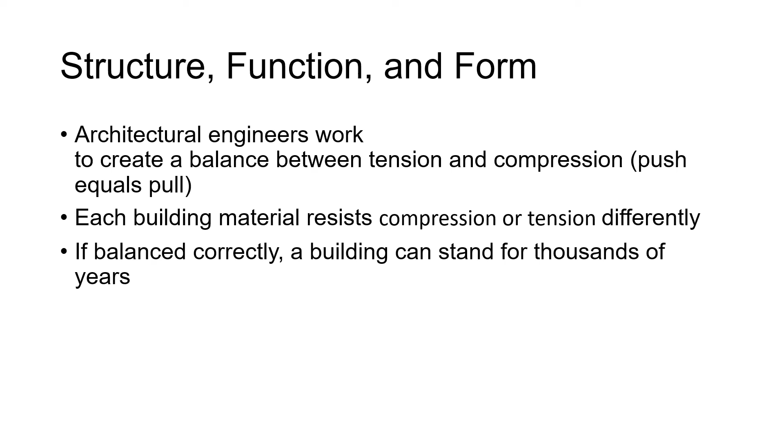Architectural engineers work to create a balance between tension and compression, which is basically push equals pull. Each building material must resist compression or tension differently. And if balanced correctly, a building can then stand for thousands of years.

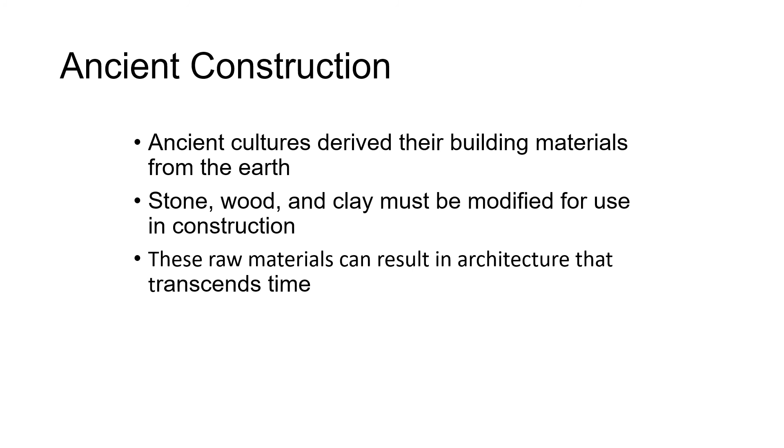If we look back to the ancient constructions of architecture from our past, there are a few things we need to think about. The fact that ancient cultures derived their building materials from the earth, that stone, wood, and clay would have to be modified for use in construction, and that these raw materials could result in architecture that would transcend time itself. We're going to first look at the most basic load-bearing construction.

This form of construction follows the direct process of piling just one stone or brick on top of another. Massive load-bearing works have been built throughout the course of history.

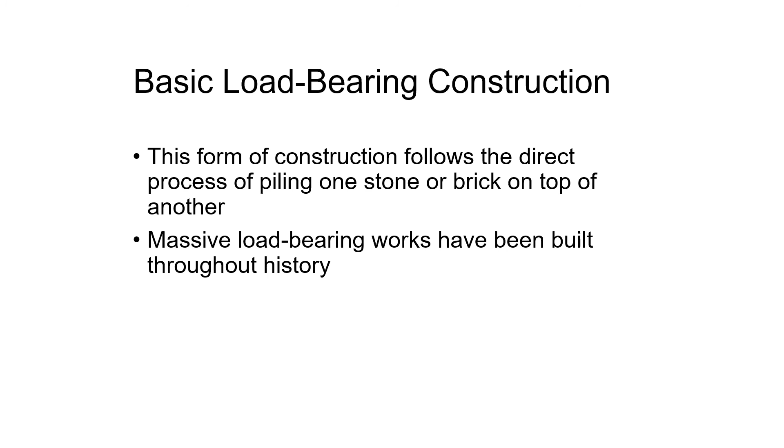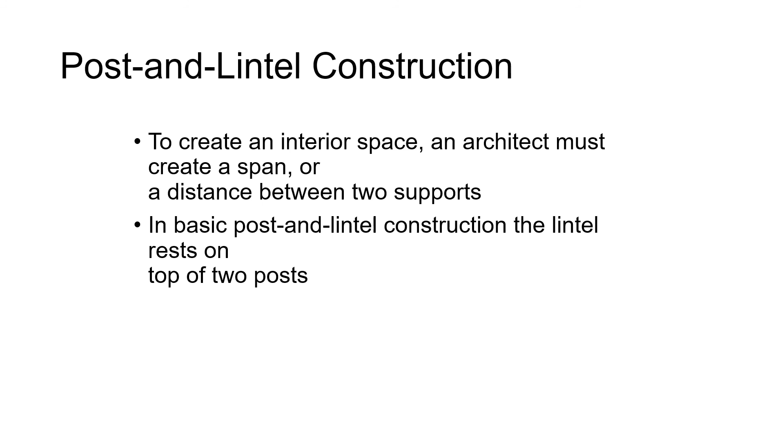As we move away from load bearing construction, we move along to post and lintel. To create an interior space, an architect must create a span or distance between two supports. In basic post and lintel construction, the lintel rests on top of two posts.

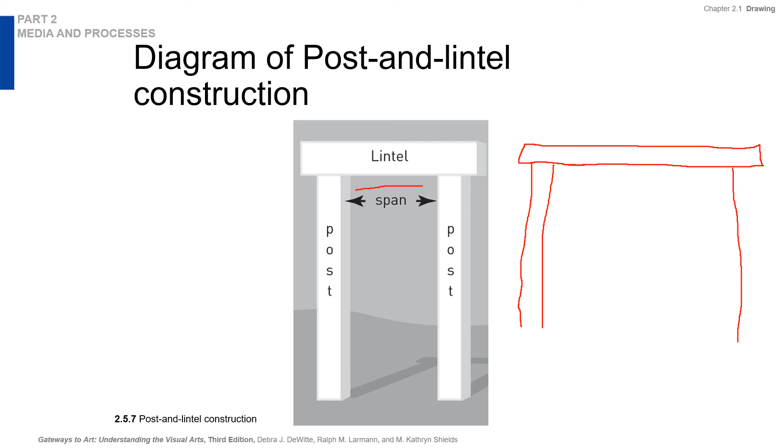If you go too far, like if the lintel is too big, right? Like if this is our post and lintel structure, right? And we put too much space between these two posts, gravity is going to put so much pressure on the center of this lintel that it's going to crack and fall apart.

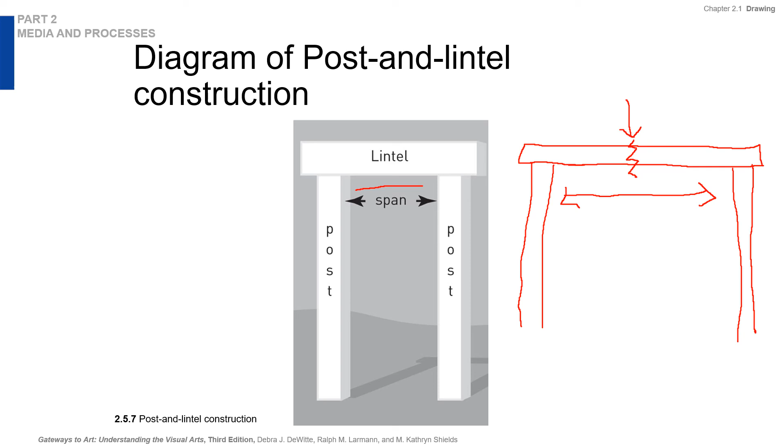That's the only problem with post and lintel - you're very limited as to the span, the distance you can create between the two posts. So that is the drawback, and we're going to see how that looks in these next few slides.

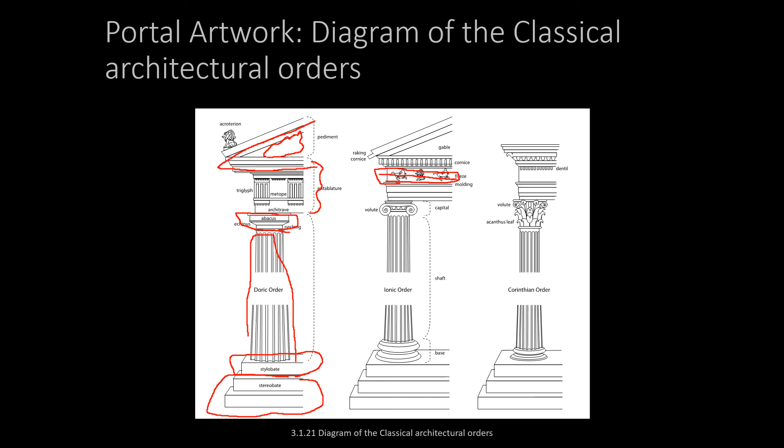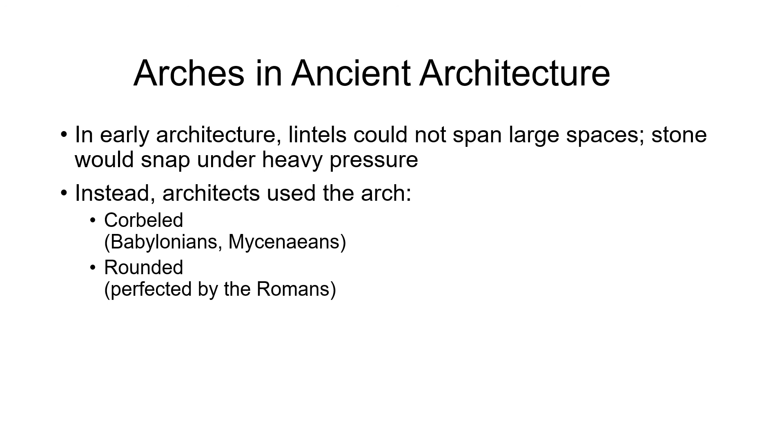Now, it's really easy to pick out a corbelled arch. It looks very much like something if you were forced to build an arch out of Lego, right? Because essentially it's just stone stacking to create a basic arch shape.

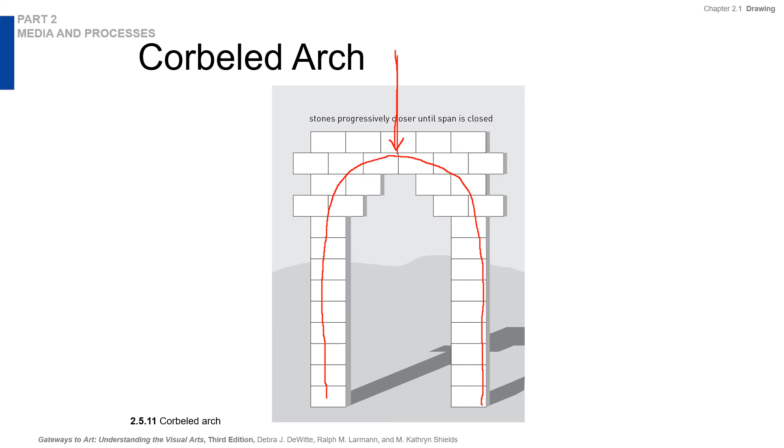The reason an arch is very efficient is that unlike the post and lintel structure, when gravity is affecting the structure, the force of gravity is evenly distributed down these legs, as opposed to hitting the center of a lintel. It's pulled to the sides, and so all of the weight is held by these really strong columns. The posts actually end up holding the weight of the structure above it, and this is how these structures are really strong.

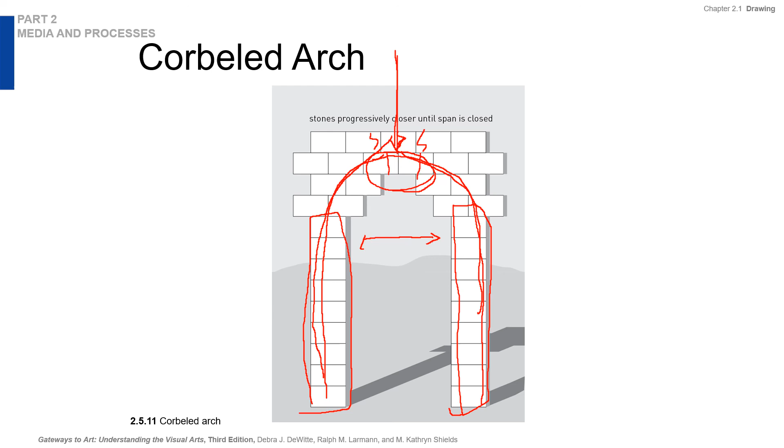But now the problem with the corbelled arch is you could only go so far, because if you went too far the force of the weight would eventually crack at least one or two of these bricks. And once two or three of the bricks would crack, the cracks would begin to travel down, and eventually the structure would most definitely fall apart.

Now, a true arch, as would be perfected by the Romans, you can see how you don't have as much of an issue of the load bearing down on the center of the arch. In fact, the top of a Roman arch has what's called a keystone, and it is shaped almost like a trapezoid. Each of the other parts would be shaped with a flat bottom and a curved top, and if you put another one in here, you start to get this natural curve.

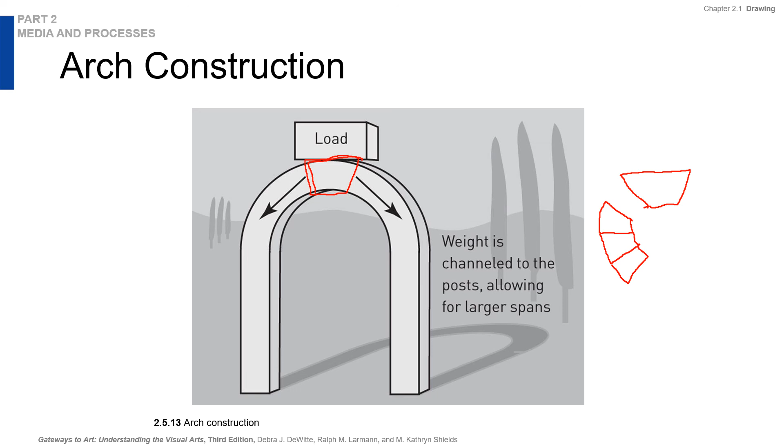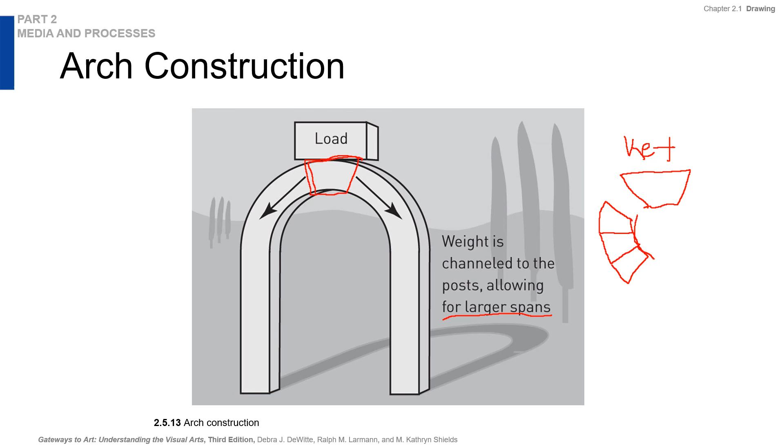The keystone is what locks the arch together and allows the weight to be channeled to the post, therefore allowing for larger spans. With an arch, you can go as big as you want, and it can go as tall as you possibly want it to be, and it will hold that weight.

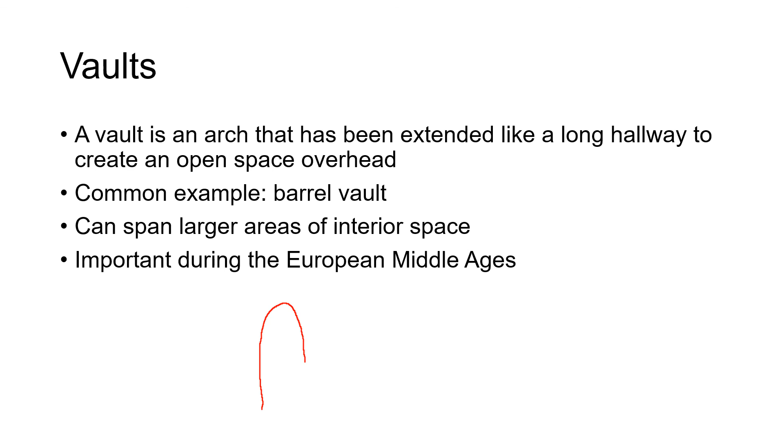Now, vaults are an architectural structure that was a natural evolution from the use of an arch. The way a vault is created - say we have an arch like this, and you wanted to build a very strong structure. You could build this arch, and then build another arch right behind it, and another arch right behind that one, and keep going and going until you have basically a tunnel of arches. Well, that is a vault.

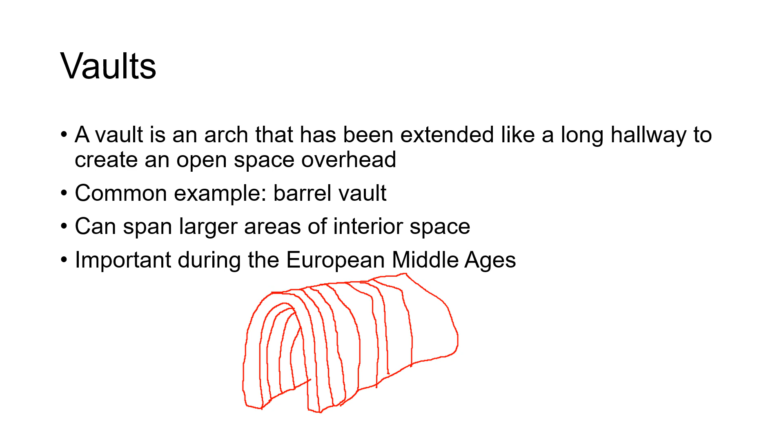In particular, that's called a barrel vault. They can span very large areas of interior space, and they were incredibly important during the European Middle Ages.

When Christianity was in its infancy, it was considered just sort of a cult in ancient Rome. It didn't have a lot of members, and most people would try to blame the Christians for anything bad that happened. It was illegal, so most Christians had to worship underground in the catacombs of ancient Rome, because if they were found, they would be crucified or fed to the lions, or any number of horrible things would happen to them.

It wasn't until Constantine, the ruler of Rome, converted to Christianity that Christianity became legal, and Christians began building their own churches. For hundreds of years they had worshipped beneath Rome in these catacombs, and the barrel vaults that held up the streets of Rome were where they worshipped. So they took that as part of their heritage, and started to build their churches to remind themselves of these tunnels beneath the streets of Rome.

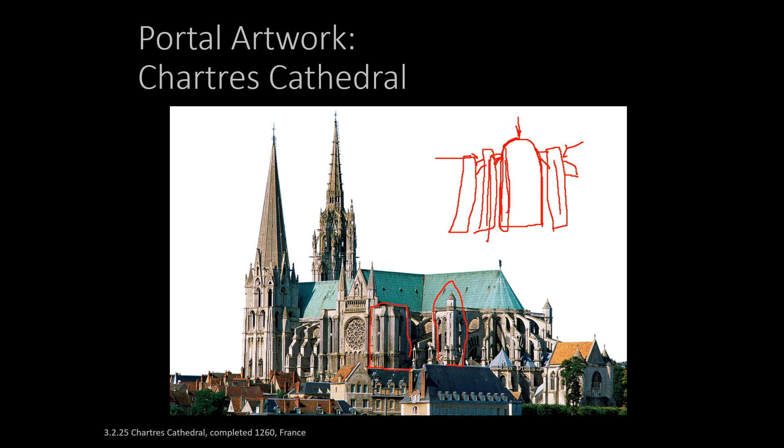If they got even taller, they would add another tower and another flying buttress. So they can get really tall inside, but in order to do that, you have to add more and more towers and buttressing to the outside of the structure.

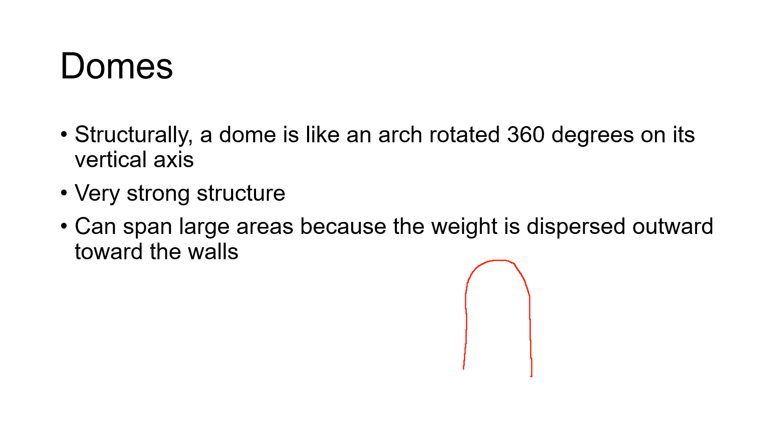The next evolution for the arch would be domes. Domes are very much like an arch that is basically rotated 360 degrees. So what you're essentially doing is taking your arch and spinning it - like one arch, repeated around and around to create that dome structure. Usually at the very top, a hole would be left to allow light into the interior of the dome. That would be called the oculus.

Domes are very strong structures, again, because each arch has another arch next to it, helping to hold up the weight. All of the weight is then dispersed outward toward the walls.

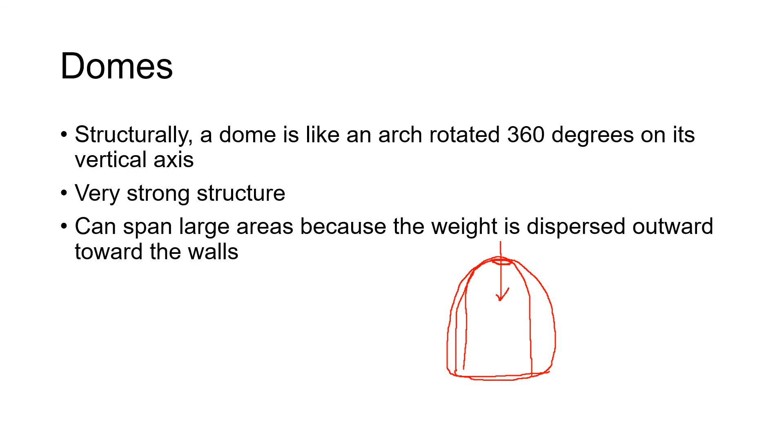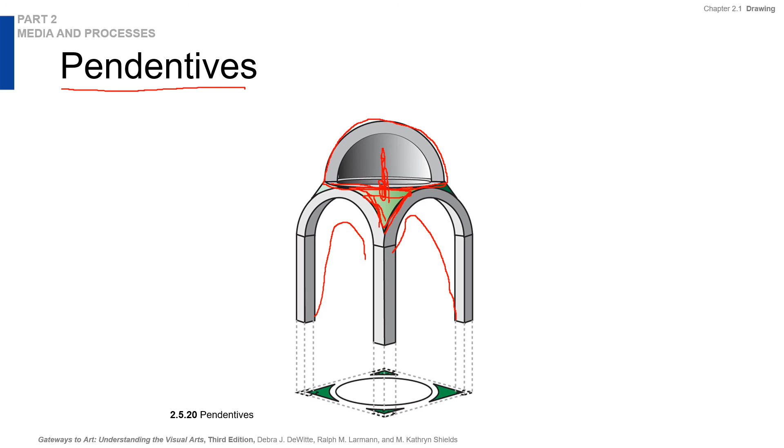One very important part of the architecture of dome making is the pendentive. Here you have four arches, one in the back and another, so you'd have four arches to hold up the dome, like for example in the Hagia Sophia. But you would have this triangular section that would need a little help, because you didn't want this section of the dome to crack and fall. So they would fill this area with concrete to continue that strength of bringing all of the weight down into the legs, these posts. That triangular area is called the pendentive.

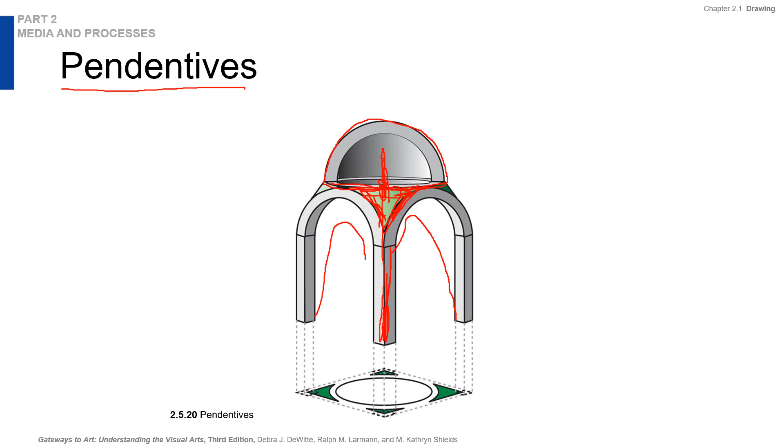The next type of architecture we're going to talk about is post and beam, or wooden architecture. The post and beam construction technique has been used to build some of the world's finest wooden architecture.

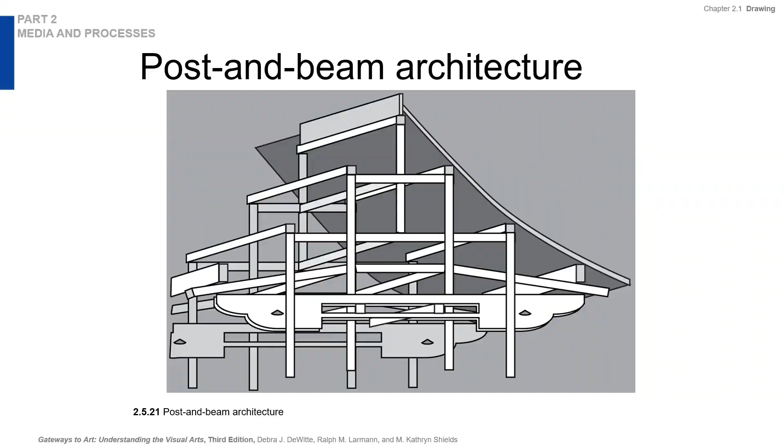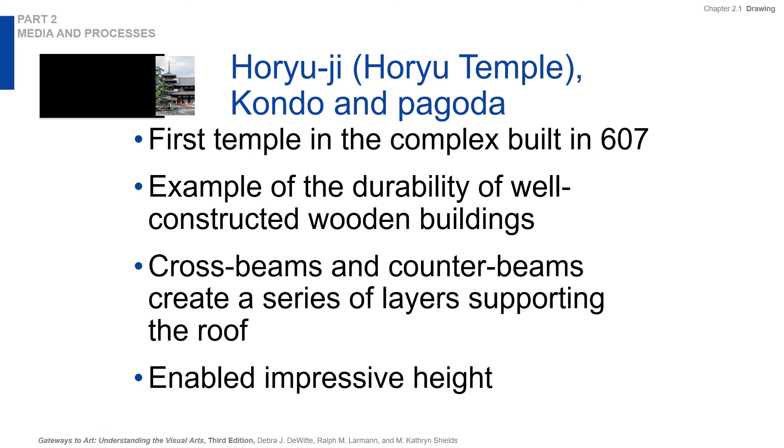One example of wooden beam architecture is the Horyu-ji Temple in Nara, Japan. It is one of the first temples in this complex, built in 607. It is an example of the durability of well-constructed wooden buildings. The use of cross beams and counter beams creates this series of layers which help to support the roof. One thing that is very typical in wooden structures like this, because it's lightweight but strong, is that it has an impressive height.

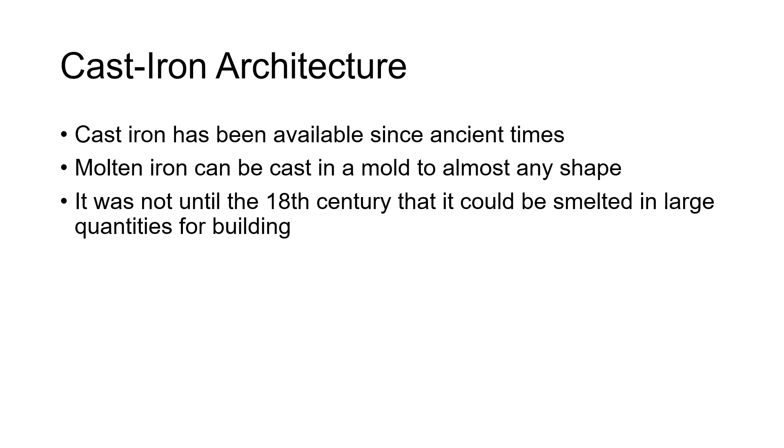After the perfection of building through wood, once iron became easier to smelt, cast iron would become much more common within the building of architectural forms. Cast iron has been available since ancient times. Molten iron could be cast into a mold to almost any shape, but it wasn't until the 18th century that it could be smelted into large enough quantities to build with.

A majority of buildings constructed over the last 50 years have used steel frame construction. Steel is a material made from iron and a small quantity of carbon. It is stronger than pure iron, less likely to break, and has even greater potential.

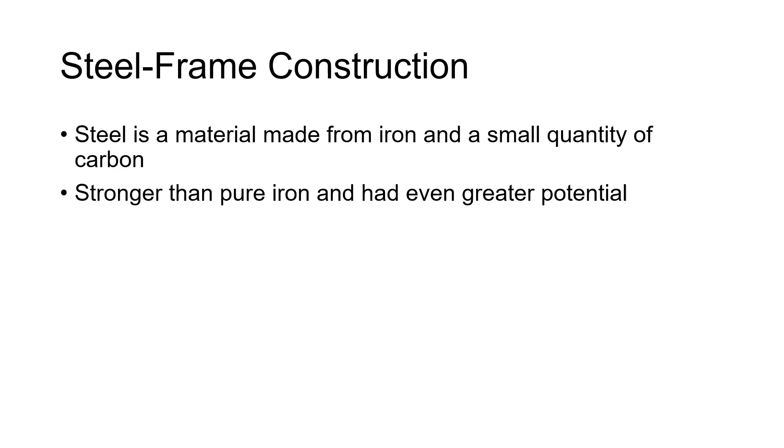Louis Sullivan, who many consider to be the father of modernism, is the person who pioneered the use of steel and created the first skyscrapers. He believed in this idea, which would be carried forward by architects such as Frank Lloyd Wright, that form follows function, that you should always have a versatile interior space that serves the people who live in it or work in it to the highest degree. The exterior of the building reflects the elements of an actual column, as we've seen for hundreds and hundreds of years.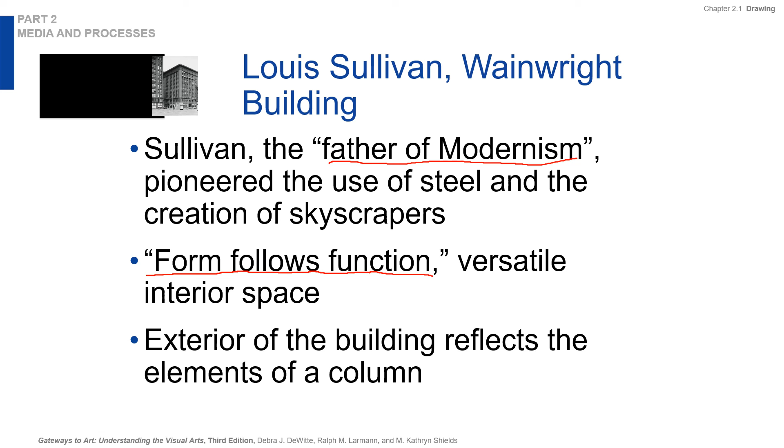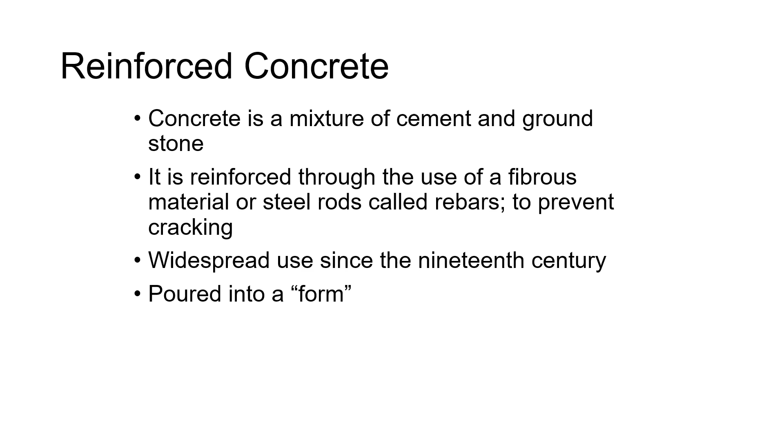One of the most important materials used in architectural structures since Roman times is reinforced concrete. Concrete is a mixture of cement and groundstone, reinforced through the use of a fibrous material, which can be almost like fiberglass, or steel rods called rebars, put into the concrete while it's still wet, which helps prevent cracking. It has had widespread use since the 19th century, and concrete is typically poured into a form so you can make basically any shape you want.

Postmodernism basically began in the 1980s, and it was a reaction to all of the modernist architecture that had happened before it. Postmodernism combines the hard rectangles of modernism with new materials that they didn't have previous to 1980, and features of styles from the very ancient past.

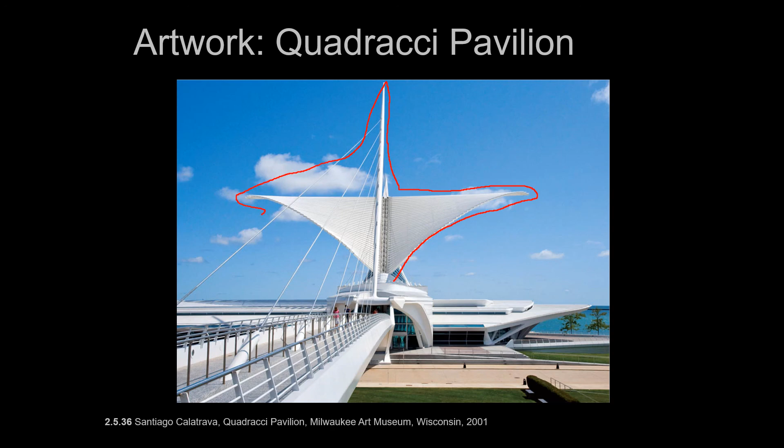Another example of postmodern architecture is the Quadracci Pavilion, located in Wisconsin. You can kind of see how this uses a range of different architectural forms, referencing the Greek temple along with the way boats are actually put together, forming an architectural structure that looks very different from anything that precedes it.

Today, in the 2000s, architecture has really not changed a lot. The one thing that has changed architecture is our interest more in green architecture, architecture that is self-sustaining. Concerns over limited resources, energy conservation, and sustainability have become the most important issues. So now a lot of architects don't have a choice, and they want to create these buildings that are more eco-friendly.

Kaufman actually looks at this as an inexpensive alternative to costly California homes. It's based on a prefab module made of sustainable wood. It has double pane windows, roof solar cells, and as I said earlier, it is made completely out of recyclable materials. And that ends our lecture on architecture.